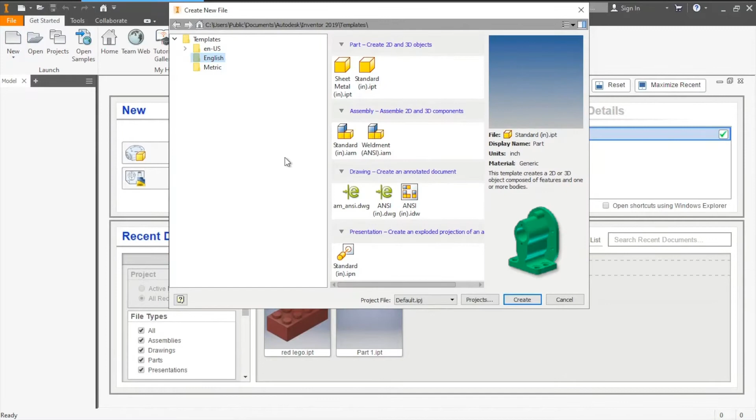Of course, we're gonna go New. This is gonna be in English. So let's click English, standard, inches, IPT, Part, click on Create.

From here, we're gonna click on Start 2D Sketch, and we're gonna work on the XZ plane. You can actually click it on this side, XZ plane, or click it here. Either one will work.

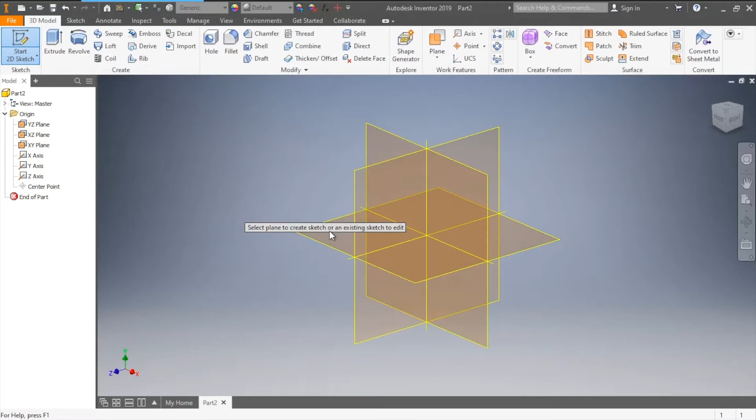I like to use a 2-point centered rectangle, that way everything's in the center. But either type of rectangle will do.

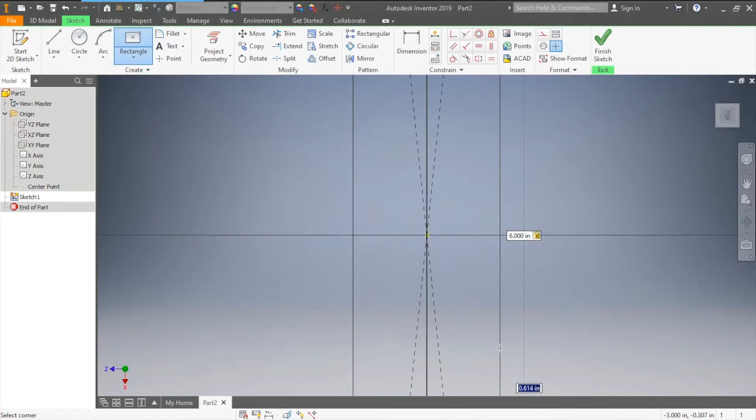And the length is 6 inches, and the width is 3.5. Then I'm going to click tab, that way I can lock those numbers in. You can see that they're locked in right there, and then press enter, and that looks pretty good.

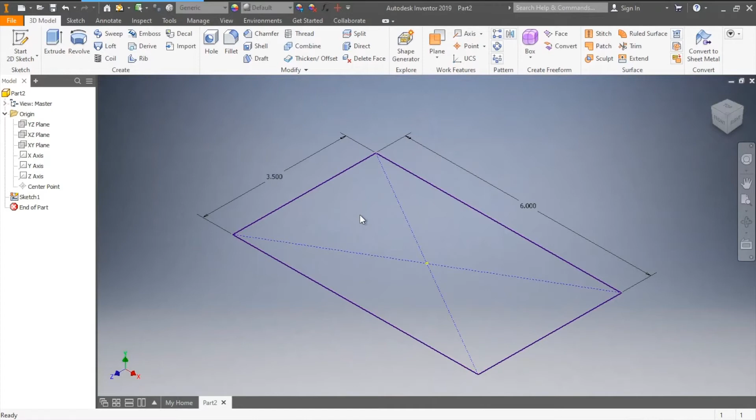Next, click finish sketch, and then we're going to extrude. Click on extrude, 2.75 inches. We're going to extrude up, which is by default.

I'm going to click on home again, that way I can view my entire part. So now we have a rectangular prism. There's a hole here. I'm going to go ahead and put that hole first.

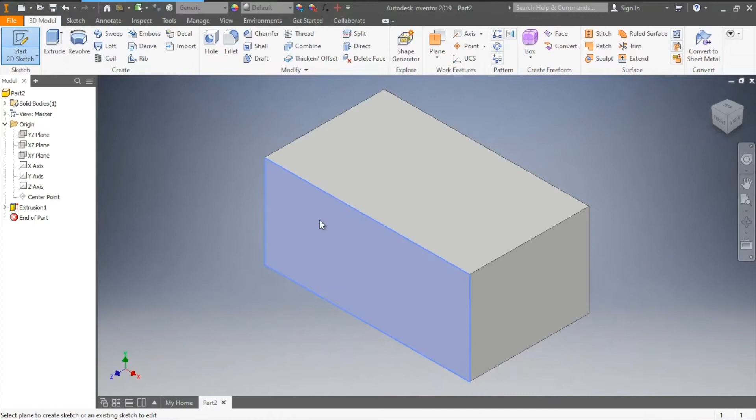The way we do that is we click on start 2D sketch, click on this side, and what I want to do is put a circle. Now where I put it doesn't matter, because I'm going to use the dimension command to put it to where it belongs. What is important is the diameter, which is 1 inch.

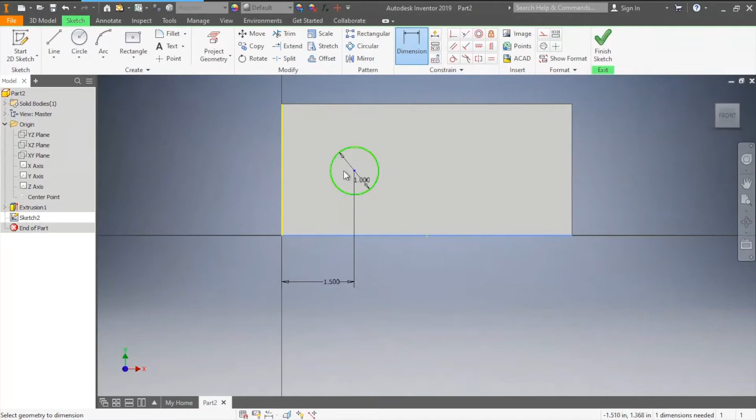I'm going to press tab to lock it in, press enter, and then go to dimension. Now from this wall to the center of this circle is 1.5 inches, and from the bottom edge here to the center of the circle is 1.25 inches.

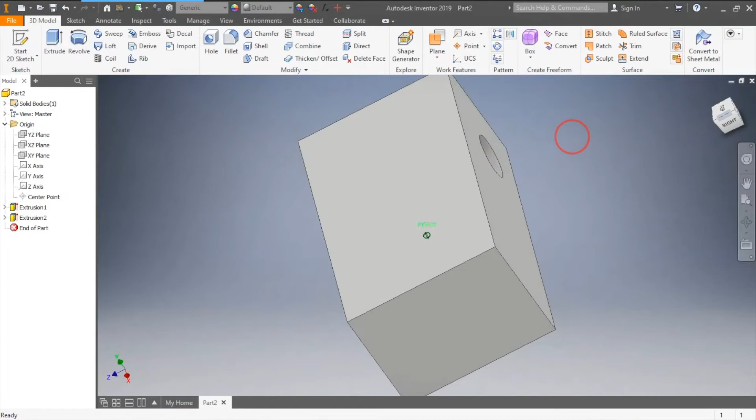And we're going to finish sketch and extrude. Click on this extrude, and we're actually going to go cut, and it'll invert it for you. And we want to cut it, change that to all, and it will cut it all the way through. Press OK, and you can actually move the view cube to see what it looks like all the way around.

Okay, the next thing we need to do is we're going to cut this top part here. So we're going to cut it out of this face. Click on start 2D sketch, click on this face.

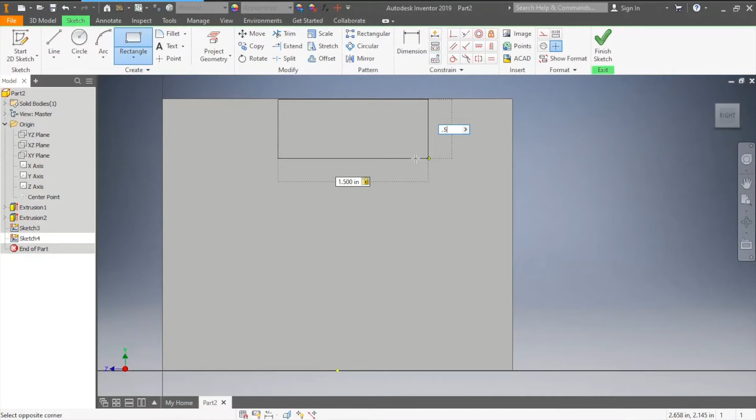I'm going to switch it back to 2-point rectangle. The length of this one is 1.5 and the thickness is 0.5. Once both of those are locked, I hit enter.

Then I'm going to use the dimension command to make sure it's at the correct distance. So this edge and this edge should be 1 inch. Once I'm done with that, click finish sketch.

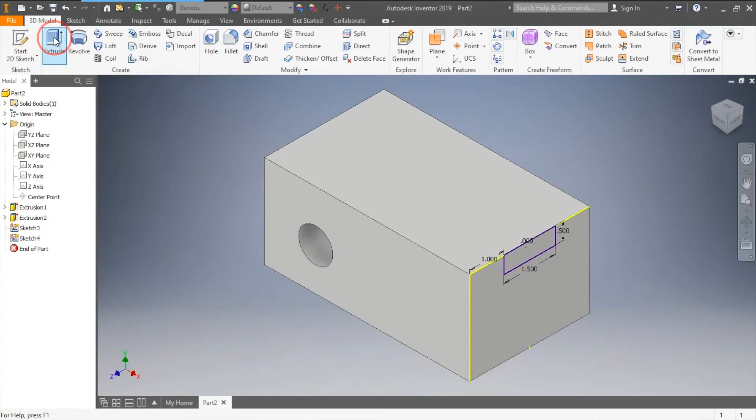So once we have this rectangle drawn, click extrude, cut, click on this, and then go to all. And it cuts all the way through, click OK.

The next thing we're going to do is we're going to cut out this corner right here. Click on 2D sketch, click on this top line, and I'm going to click on this edge, and then I'm going to click on this edge, and then I'm going to use the dimension command to dimension it correctly.

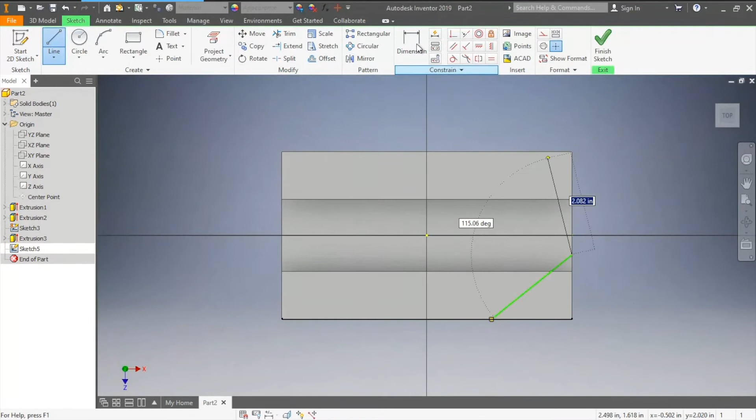So this point and this point should be, the dimension is actually a subtraction, so 3.5 minus 1.75, because the dimension from here to here is 1.75. And that's actually the center. Next one is the distance between this point and this point is 4 inches.

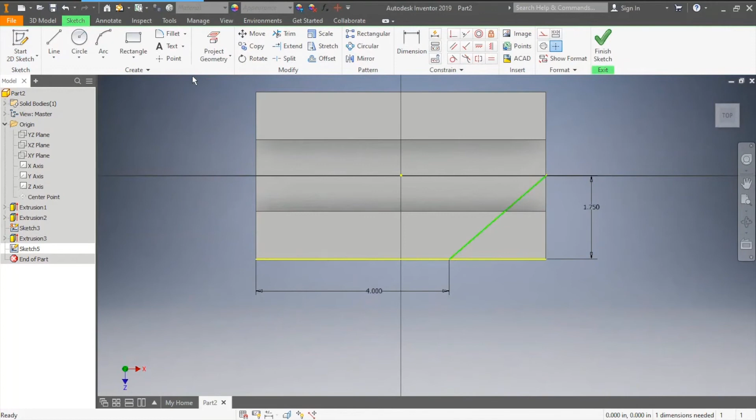Next thing I'm going to do is I'm going to close this rectangle. Right click, click OK to get out of the command. Finish sketch, extrude, cut, and then we'll do all.

It's taking shape. The next thing we're going to do is we're going to cut this last part out here. So click on start 2D sketch, click on this line.

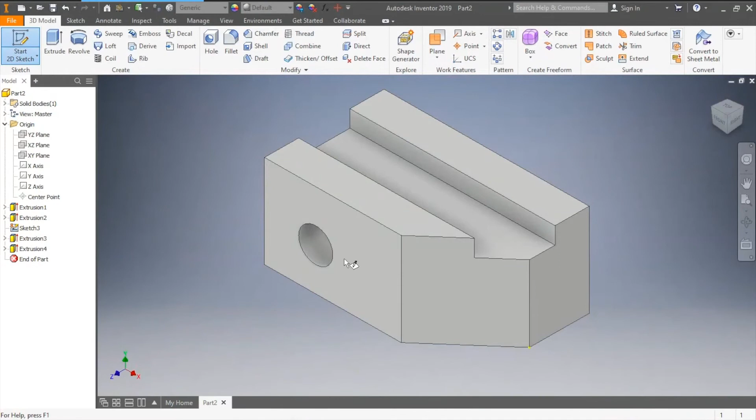This time I'm going to use the point command to mark my points. So I'm going to click here and put a point here, and I'm going to put a point here, and then I'm going to dimension them to where they need to be.

So this point and this edge need to be 2.5 inches. This point and this edge need to be 1 inch.

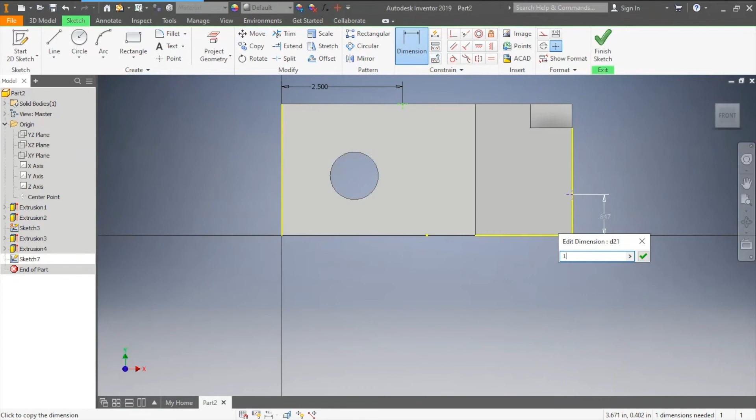Next, I'm going to draw my lines. It should lock to my points. And close it up. Finish sketch.

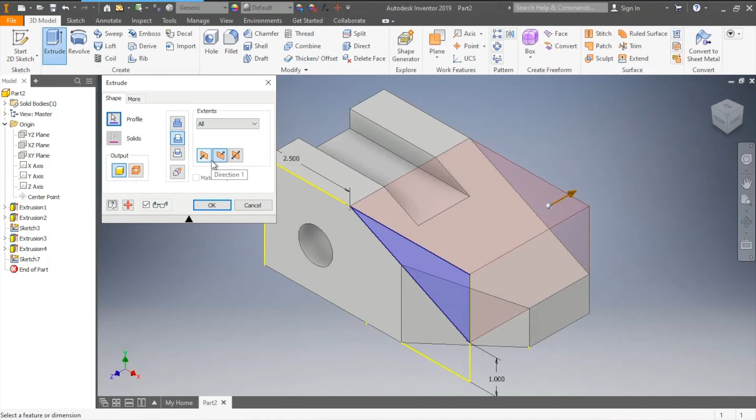Extrude. Cut. All. Click OK. And there you have it. Our wedge block is complete.

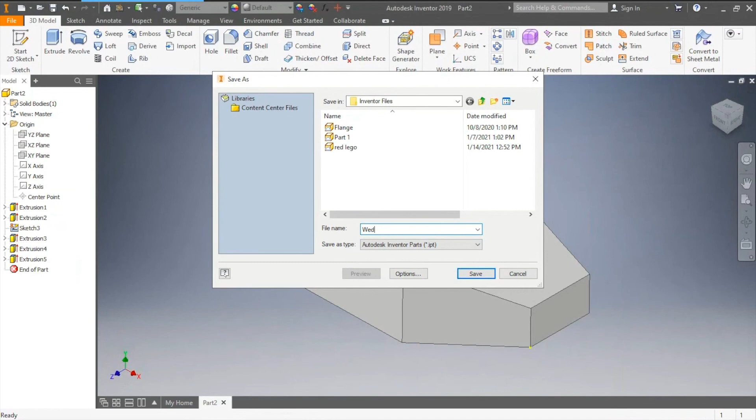One last thing you need to do is, of course, save it. So go to File, Save, and this one's called the wedge block. Save.